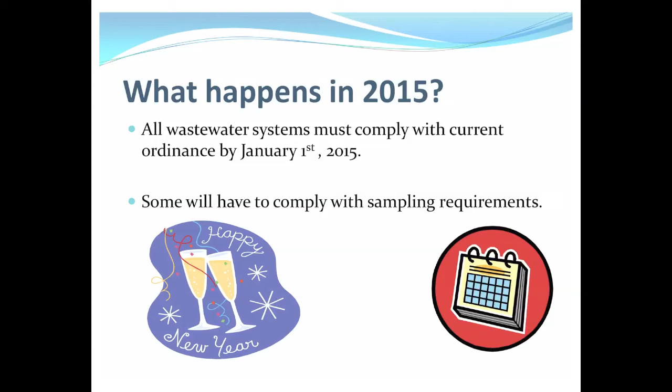Prevention is a lot less expensive than cure, okay? So instead of trying to rely on technology in the future, why not try to prevent groundwater pollution today? So that was the thinking back in 2000. It became clear that some of these upgrades to septic systems were going to be very expensive. And we're talking kind of in the $10 to $15 to even $30,000 range, depending on site conditions.

With that in mind, the county commission at the time said, we like everything about your ordinance except this one part. So let's say that it's going to take effect in 2015. So every other part of the ordinance about inspections and permits and all that stuff went into effect in 2000, as it had been before. But the part about the upgrades to the systems, based on lot size and wastewater flow, was essentially postponed for

15 years. And now here we are 10 years later, almost 11, and our office is starting to think about how we're going to deal with this issue. So that's why we're rolling out this presentation to neighborhood associations all around the county.

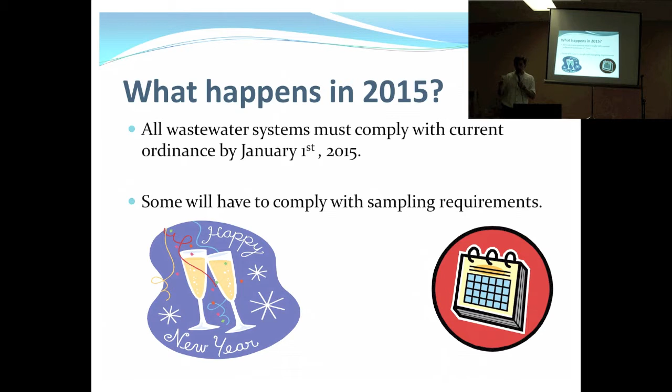Some folks already have one of these secondary or tertiary treatment units, what we're calling a high-tech unit, let's say. For folks that already have those, the change you're going to see in 2015 is that you're going to have to periodically get a sample of the wastewater coming out of the final treatment of that unit to see if the unit is still functioning properly.

I've handed out some of these charts, and there's about 20 of them floating around. Oh no, actually, they're on that table. If you could just grab one and try to disperse them. And I can email this as a separate attachment when I email the presentation to the officers of the neighborhood association.

This chart basically is a representation of lot size and the total flow in gallons per day. So that first line, okay, if your lot size, now this is 1 acre right here, and this is the gallons per day, okay? And this is design flow, it's not actual flow, it's a design flow. So if your lot size was 3/4 of an acre, you could produce a design flow of 375 gallons per day. If your lot size is smaller than 3/4 of an acre, the amount of wastewater you can produce decreases. If your lot size is greater, the amount of wastewater you can produce increases.

Wastewater flow is based on the number of bedrooms in the home, because the number of bedrooms indicates the number of persons who could live there. Okay, so we don't care if you have 1 bathroom or 4. It's really based on what is the possible occupancy of this home. If there's 4 bedrooms, the design assumptions are that in the first 2 bedrooms, there are 2 people in each bedroom, and 1 person per bedroom thereafter, okay? So these are design considerations, and this is why 3/4 of an acre is important.

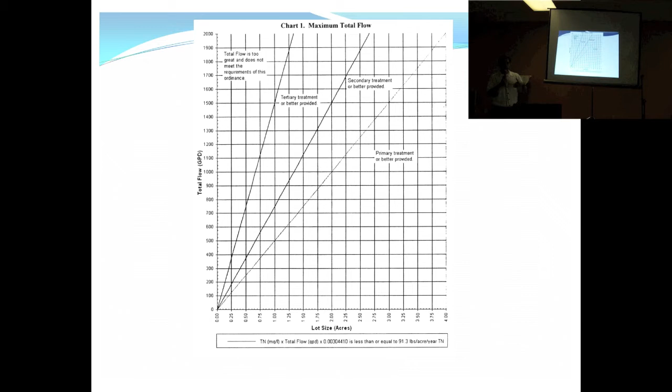As the lot size decreases and the wastewater flow increases, you get into this second category. So if you fall somewhere between these 2 lines, you'd need to have secondary treatment, which is something in addition to the septic tank. And if you fell into this final category, which is the smallest lot size and the most wastewater generated, it would be a more high-tech system that might include something like disinfection or some other type of treatment. And with each of these, the cost increases. I know you can't see that very well. That's why I put it on the wall over there. And that's just to try to get a conversation started with people about their individual lot.

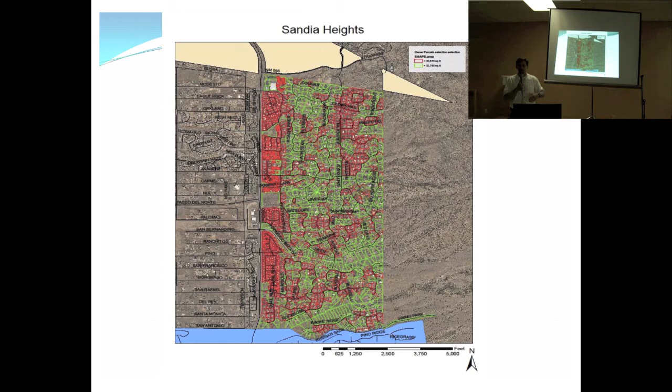And let me repeat what I said at the beginning. By the end of this presentation, and after we've all left the room, if you still have questions, what is it going to mean for me? All you have to do is call Chris or I. We'll look up all the information we have about your current septic system and the lot size, and we'll say, based on what you have today, by the time 2015 came around, this is what you would have to add to that system to make it comply. Okay, so you've got between now and I think January 1st, or maybe December 31st of 2014. So you've got roughly 5 years to figure this out.

Okay, so what does it mean for 2015? Well, many systems will just already be okay because they were built under the 2000 ordinance and they're in that first category of relatively large lot and relatively low flow. Or they were built under the 2006 ordinance.

Now, there was a change in our ordinance in 2006, and that's because the state made the disposal area larger. So they said, before where you used to have a 300 square foot disposal area in your backyard, now it needs to be 375 or whatever the number was. So in 2006, we had to make some changes to our ordinance simply to remain in compliance with what the state was implementing. If your system was repaired up to code since the 2000 ordinance, you're likely to be okay.

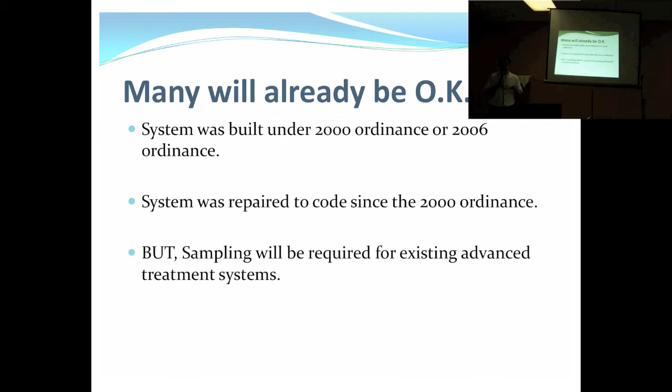But as I said, if you've got one of these higher tech systems in place now, you'll likely have to do some sampling on that in 2015. Systems built before 2000. And so I'm basically giving you 3 categories now. The first category is not much to worry about, maybe nothing to worry about. The second category is there's going to be a few things you're going to have to do, but it's not going to break the bank. Okay? The third category is an expensive category where you're going to be making some serious financial considerations. Okay? So we're in that second category now.

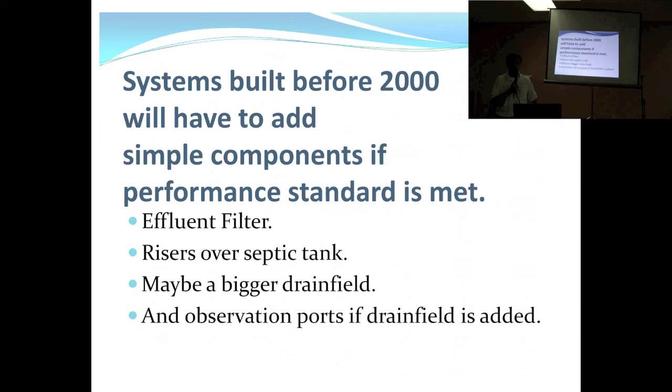Systems built before 2000 will have to add some simple components if the performance standard is met. And by performance standard, I'm referring back to that graph that shows those sloping lines that basically says lot size and flow per day. Okay, and I'm going to go through each of these 4 items now. What would you likely have to add to your system if you were in that category? Okay, an effluent filter, and I'll show you another picture of that.

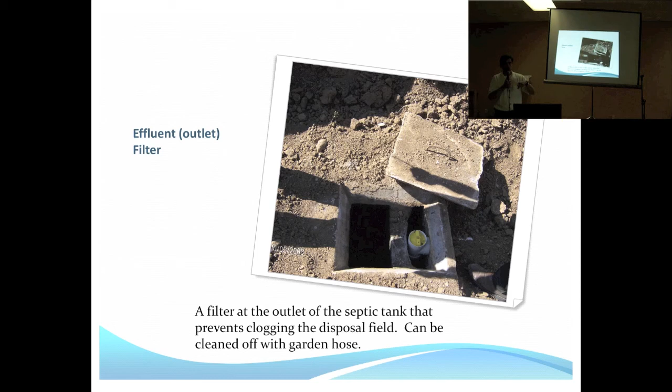That's just a picture of the outlet end of a septic tank. So from that point, the wastewater is flowing out through the pipes and out into the trenches, okay? And it's basically a filter at the end of that system that catches small bits of solid matter that would otherwise get out into the gravel and into the trenches and clog it up and shorten its life. So this is a maintenance point, basically, where about once a year or so, or when the tank is pumped, you basically pick up that filter, hose it off, and put it back in.

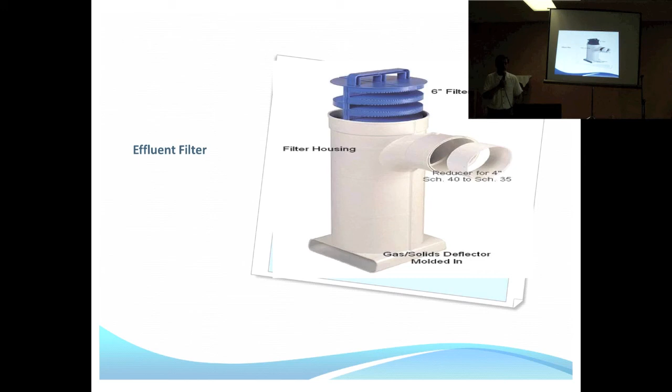That's what that unit looks like when it's disconnected from the tank. It's basically a piece of PVC pipe, and that blue part is the actual filter part. So that would have to be installed, and those can be installed in an existing septic tank in a relatively uncomplicated way. An observation port is the next thing you might have to add.

This is basically a troubleshooting feature, so that after the system has been in use for a while and it begins to have some problems, you could basically get access to the end of the disposal area and see, is there any wastewater even getting down here? Is it moist down there? Is it dry? What does it look like? So this is an access point.

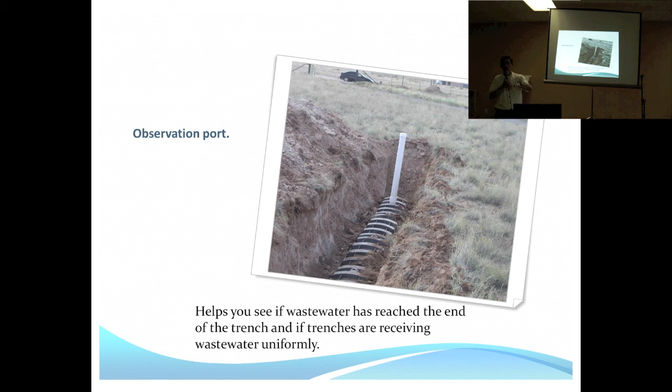So that you can do troubleshooting, because if there's no wastewater even getting to this trench, then the problem is further upstream. If this trench is saturated, is the other trench saturated? And you can begin to do some troubleshooting about what might be going wrong with my system. Maybe a heavy truck drove over through my backyard when I was doing some work back there, and it tilted something so that no water is getting over to this trench anymore. This is a way to find out.

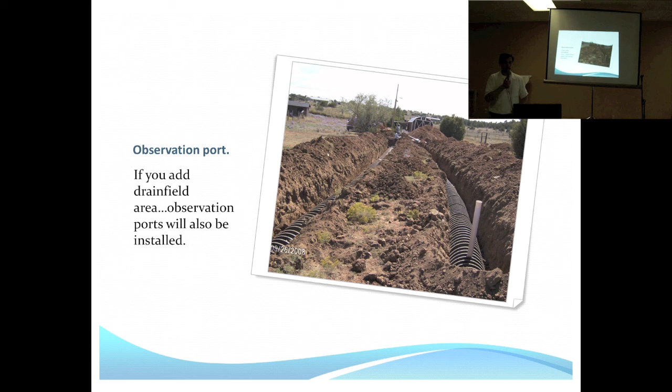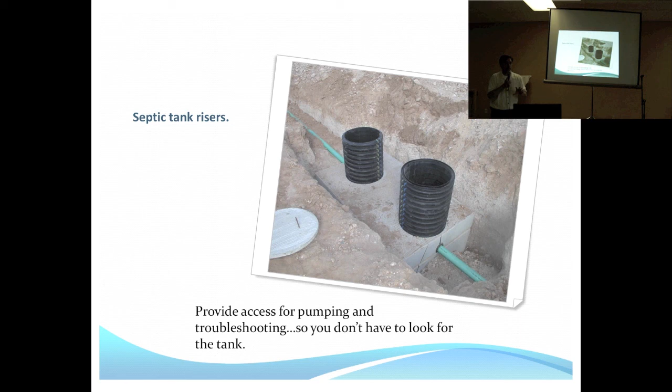This is just another picture of observation ports, except in this case they're not in gravel, they're in those plastic chambers. This is the same picture we showed before. A lot of septic tanks don't have risers. When the 2015 requirements come into effect, it'll be a requirement. This essentially makes it known where this tank is, and it ensures that we can actually get access to it to pump it out.